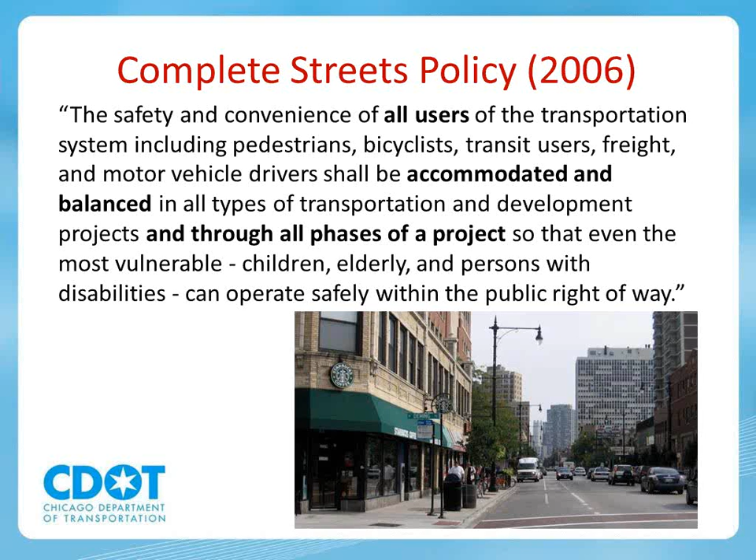So we've had a complete streets policy in the city since 2006 that you see on the board here, to accommodate and balance transportation for all users. But what does it mean? We didn't really have it spelled out in terms of roadway design until we came out with the design guidelines in 2012.

Why is it important? All the reasons listed here. Better health if we get people walking and bicycling. We find that neighborhood business districts are more vibrant when they're compatible with walking and biking, and these are more and more the areas where people want to buy homes and live. Safety, we are trying to reduce crashes, reduce speeding, and protect life. We also find people are driving less and using other modes more. We've got environmental challenges, heat island, and climate change that we want to address, as well as making sure the infrastructure we build today is going to last longer and serve more purposes than how we've thought about it in the past.

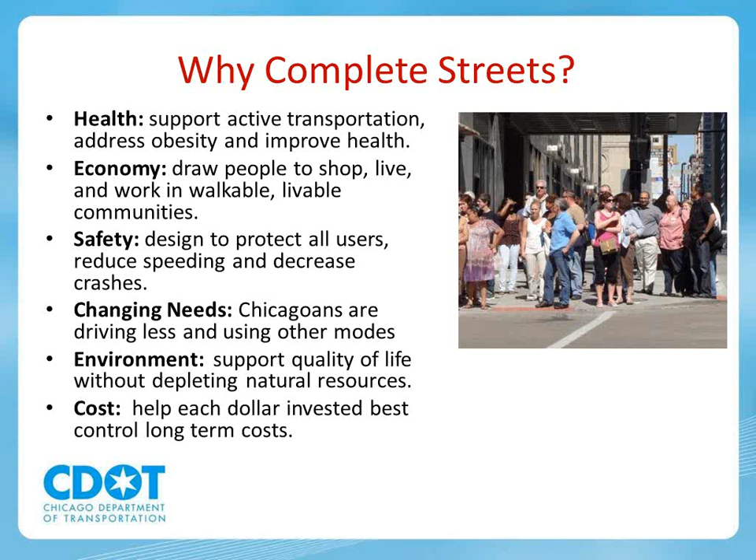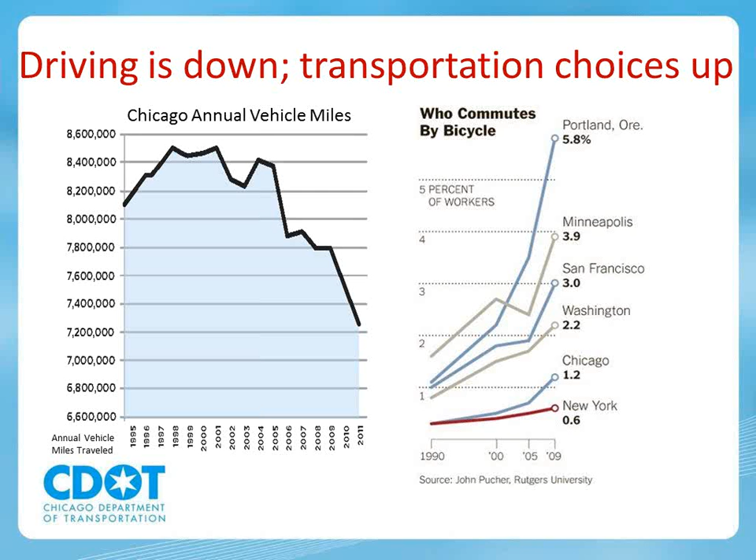So here's just a sample. We find that vehicle miles traveled is going down. It went down with the recession, but you'll see that the trend continues, and people continue to drive fewer miles. At the same time, as cities invest in other types of infrastructure, they see an increase in bicycling, shown on the right-hand side here. Cities that have made these investments are finding that bicycle commuting is going up, and we also want to see walking mode share go up as well.

So CDOT's goals, and remember there's a quiz at the end, hint hint, is to eliminate pedestrian crash fatalities in 10 years. We set that out in 2012, so this is by 2022. It's really all traffic fatalities, but I'm the pedestrian coordinator, so we're really trying to address pedestrians first as the most vulnerable road users. We want to reduce injury crashes 50% in 5 years, and also increase the amount of commute trips made by walking, biking, transit, and also working from home, which tends to compete with some of these modes. And we're right now at 38%.

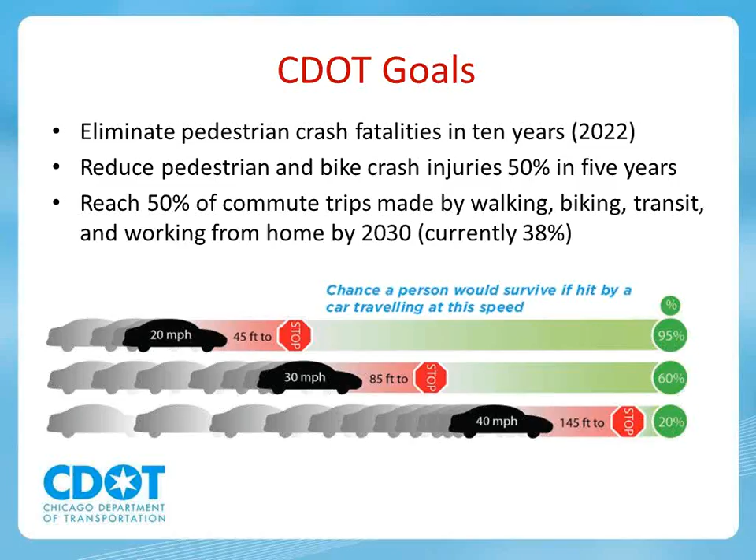Good afternoon, everybody. All of these goals, and a lot of what Suzanne is going to talk about today, are really part of this broader umbrella of efforts by the department. What we're calling it, or how it's manifesting itself, is this kind of three-pronged approach to making great streets for the city of Chicago: starting with our Complete Streets Guideline, which we're going to talk about today, as well as the Sustainable Urban Infrastructure Guidelines, which we'll touch on also, and then forthcoming, our Placemaking Guideline. The idea is that the intersection of all three of these design guides will really lend themselves to creating better, safer, and sustainable streets for the city of Chicago.

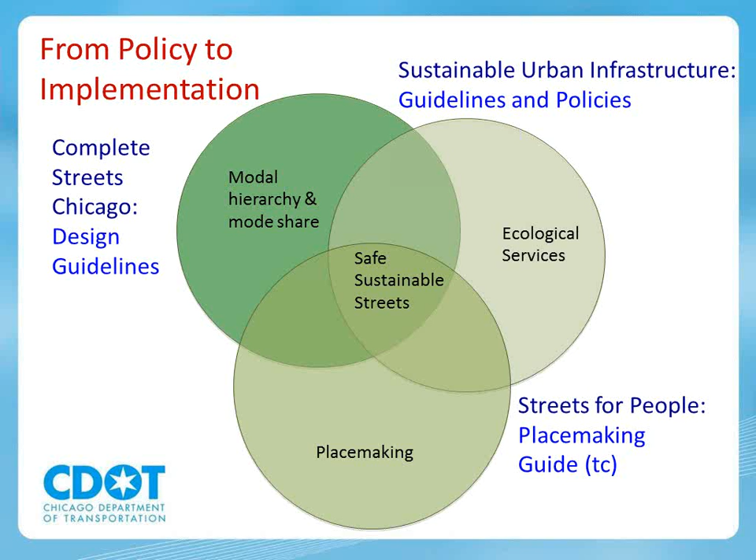And really how we're accomplishing that is through our implementation process. As you can see on the screen here, we're outlining our project delivery process across the board for all three efforts. What that means is that it'll actually be one coordinated project delivery process whereby we're taking into consideration safety and complete streets, as well as sustainability, and, as I mentioned, forthcoming placemaking, to really make a better public way for the city.

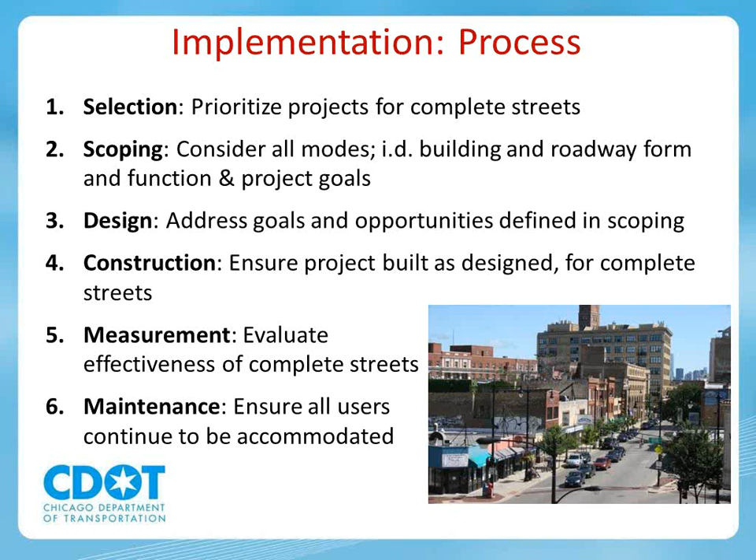And it'll boil down to some very project-specific guidance. In order to do that, we've created a tool that we're kind of beta testing right now at the department. We call it the Project Delivery Notebook. It's essentially a document that tracks our project delivery process and provides guidance for step-by-step decision-making. It also ensures oversight by the compliance committee. But the thing to take away from this is that while we do have a compliance committee, and while we are setting forth requirements for projects, the process itself does allow for variances, and also allows for projects to deal with existing conditions through those variances as well.

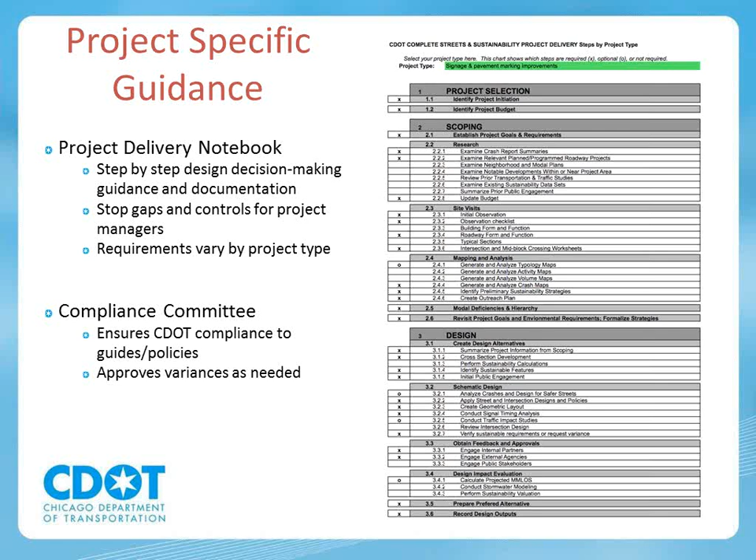So as the project moves through the department, we're able to see where it's at and how it's been progressing. For firms that have CDOT jobs, you might see in RFPs that you have to meet complete street goals, and this is the tool that your project manager will hand you and work with you to provide guidance during the project delivery process.

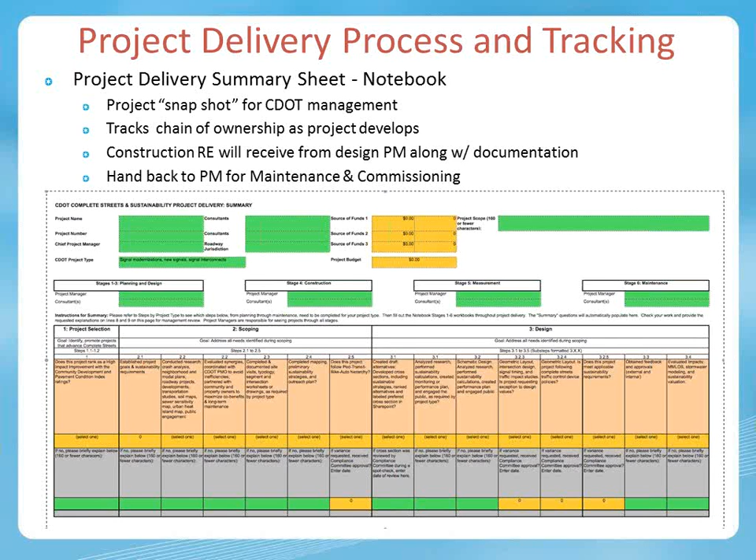Getting into the content of what it means to design complete streets, the Complete Streets Design Guide at the very end will give you our website so you can go and access the guide online. It's organized into modal hierarchy, typology, design values, and procedures.

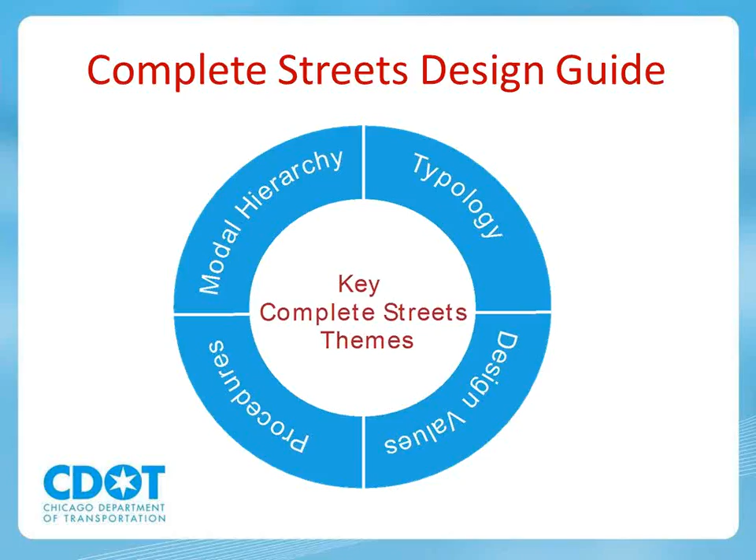So this is really the crux of it. We are now designing our streets with the pedestrian in mind first, then transit users or transit vehicles and users, bicyclists, and then automobiles. That's really a flip of what we've been doing for 50 to 100 years, where we've thought about the automobile, the speed, the turning radius first, and then let everybody else kind of borrow the street.

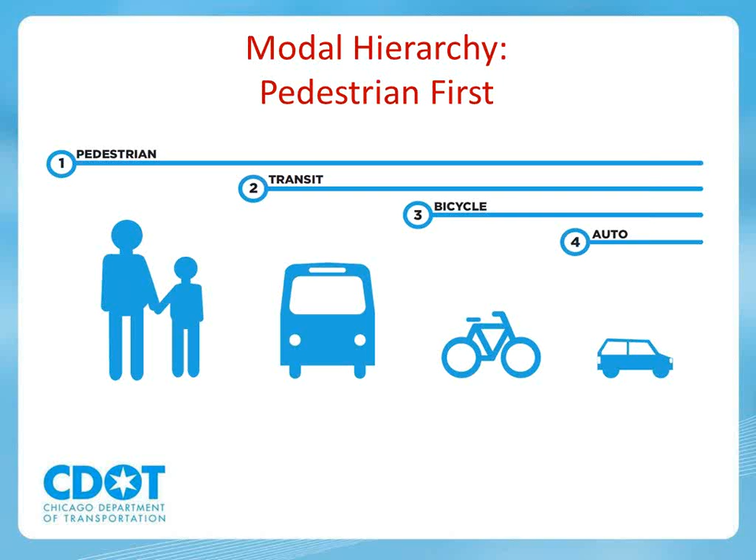We're really trying to make it so we accommodate our most vulnerable users first. This doesn't mean that we're designing pedestrian-only streets or bicycle-only streets. It means that when you're making choices between the modes, you're going to optimize for pedestrians first. So thinking of turning radius, you're not necessarily going to optimize for a semi first. You're going to think about how that pedestrian, how the family with a child is going to cross that street safely first.

So what does it look like? This is not my favorite complete street because I find that it's still pretty wide and we're kind of retrofitting a pretty big, pretty fast street. But you'll see that we've included a lot of complete streets elements.

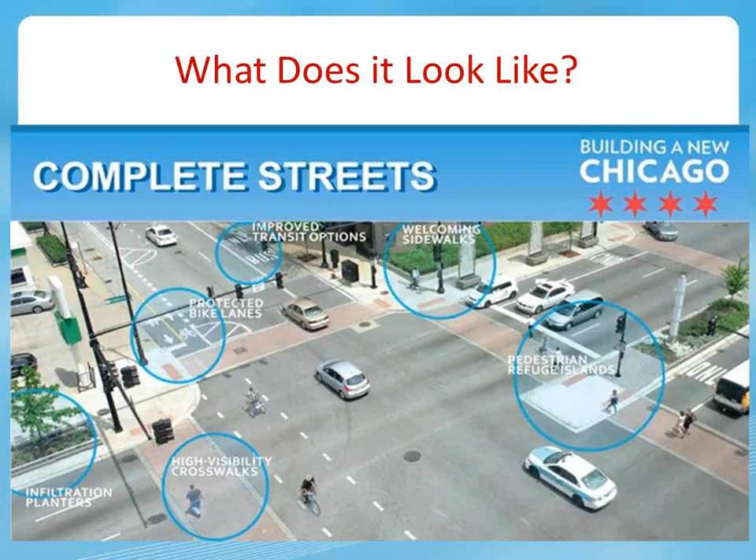You've got bike lanes there. You've got decorative crosswalks, we also use the continental stripes, which is more high visibility. You have pedestrian refuge islands for someone, and it happened to me the other day, who gets stuck halfway across and has to wait for the next light cycle. You can see there's transit in the picture, taxis, infiltration planters, so we're also addressing stormwater, and then it's more attractive than it used to be.

So there's a few important things about complete streets. It's not that you will always have all these elements as shown here in every single project you do, but you're going to think through your project and make a lot of choices during the design based on complete streets principles. So we're really building a lot of things up front in the process.

Many of you may be doing this already, looking at crash history before you even scope your project. So trying to find out where the conflict points are, what are issues of concern, and where you can make some improvements, and how the crashes happen. Are they turning crashes, straight ahead crashes, rear end, what's going on the street?

Putting those planners to work and starting to use some of the neighborhood plans and transportation plans that have already been developed. Environmental conditions, it's going to be important what kind of soil you have, how much water you can infiltrate. If you've got flooding issues that you can solve in your design, addressing urban heat islands, and can you add to public space? A lot of times there's spots in the roadway where the lane doesn't continue, or a car never reaches that corner, and you can turn that into more public space or pedestrian space.

It's also important to get out there and see who's using the road and how. Where are the bus stops? Is there a hospital there that people are going to? Do they always cross in the middle of the street? There's ways to address that in your design.

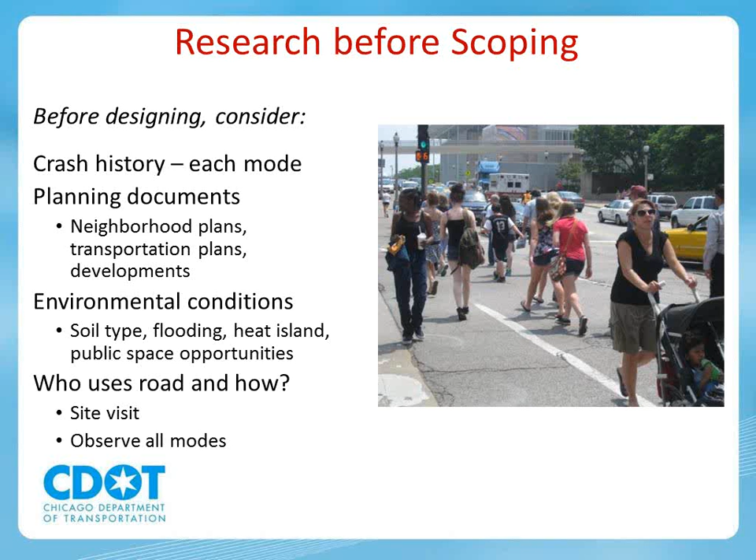This is an example of a crash map we did for a project at the Kimball Lawrence transit station. Our project footprint is an eighth of a mile around the transit station, so we mapped pedestrian and bicycle crashes. This is specifically a walk-to-transit project, so we didn't really look at the automobile crash patterns in this map. We were mostly concerned with what pedestrians were doing, and then we tried to address the hot spots during the design.

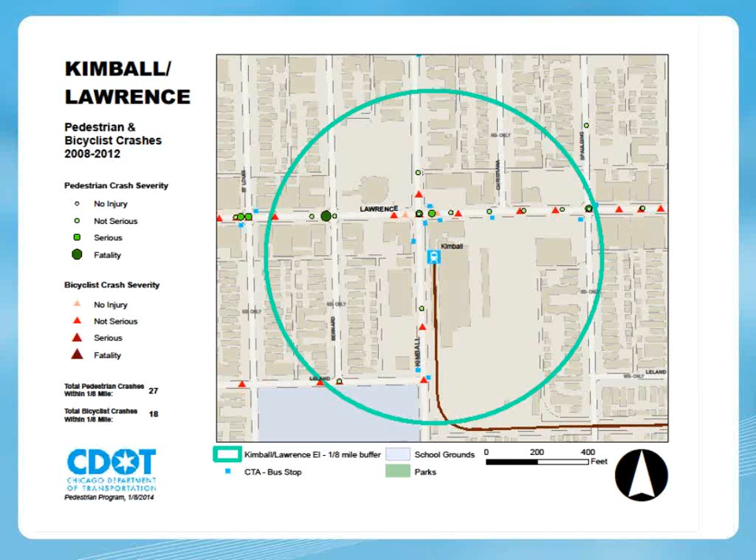Another thing that's different about Complete Streets compared to previous processes is what you're looking at in the built environment. We're starting to look at building form and function and roadway form and function, not just what type of street you have, how many lanes, and how fast everyone goes, and what the level of service is. We want to start looking at the land use, what type of businesses are there, what's the regulatory zoning, and also the roadway form and function, what's the character of the roadway, who's using it and how, what's parking like, what do traffic operations look like, looking at intersections and conflict points.

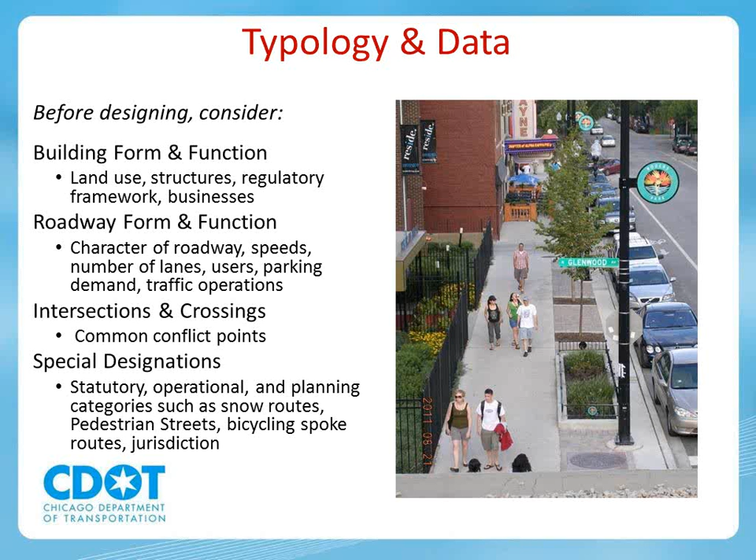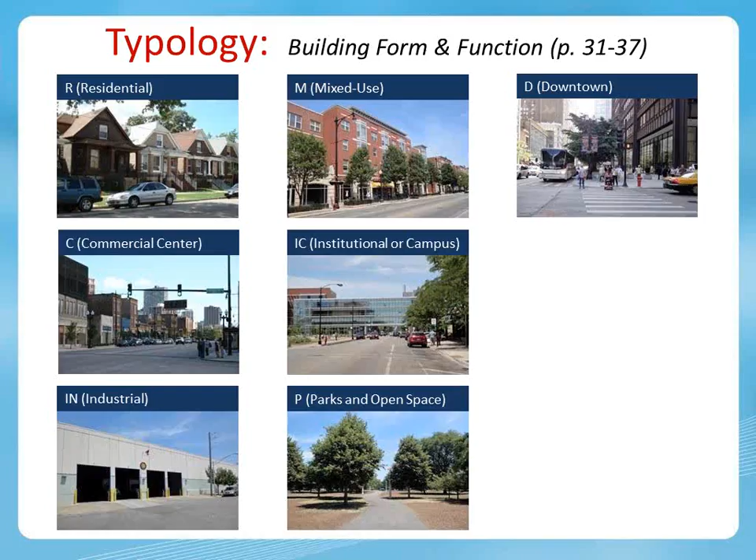Just quickly, our building form and function typologies are residential, mixed use, downtown, commercial centers, institutional or campus, industrial, and parks and open space. We don't have a master map of this - it's really at the discretion of project managers and the design team. I find that when you get into Google Maps and Street View, you can assess this pretty readily. It's not an exact science, but you should be able to tell what the predominant use of your project is, and it may change - two blocks with one type of thing and three blocks with another.

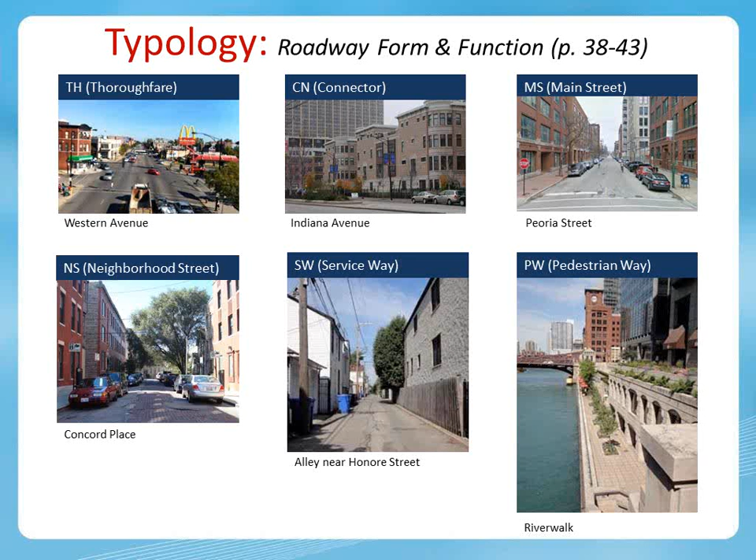Intersections and crossings, same idea. I won't talk all the way through this, but you can find these on page 44 to 50.

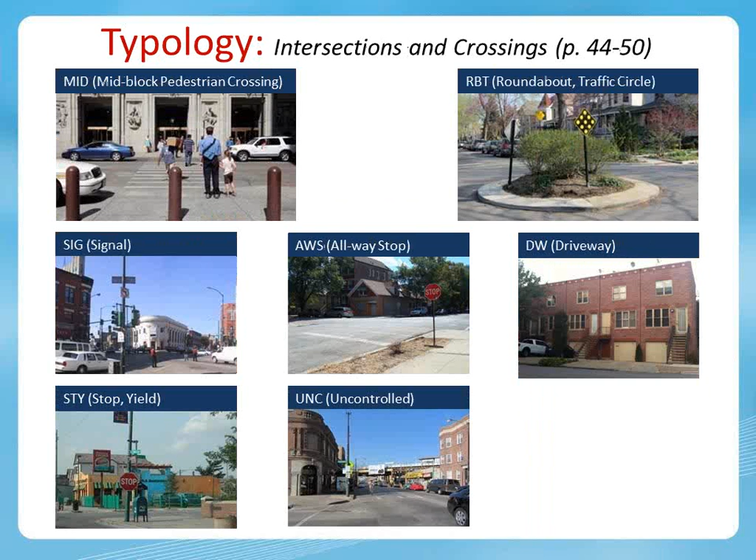Just like the Complete Streets Guideline has its structure, the Sustainable Urban Infrastructure Guideline has a structure as well. It starts out with our mission and purpose statement, and then quickly goes into what we're calling 8 environmental categories. For each of those categories, through our task force - which consisted of staff from various sister agencies, as well as various consultants and people from the industry - we set objectives for those categories, and they were ranked based on what that task force felt were priorities for the city of Chicago.

In order to meet those objectives, we set some requirements. These are very specific actions or activities that can be done in a project, both during design and during construction, in order to meet some of the objectives for sustainability. We also provide a series of strategies, and these will be clearly outlined in Volume 2, which is forthcoming this summer. The strategies in Volume 2 are essentially a toolkit for how to meet all of the objectives and requirements that each project necessitates.

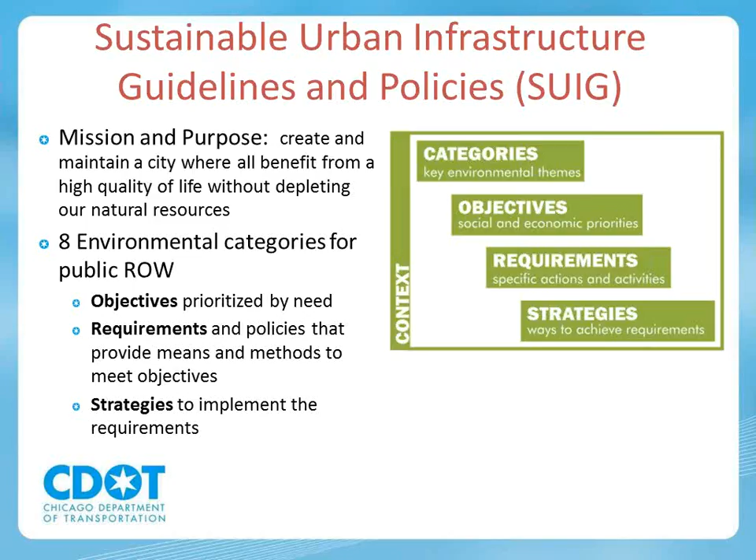So again, here's some of the categories and objectives. There are 8 categories - these are the first 4: economics, water, materials, and waste. Underneath those, you'll see the objectives, and again these are prioritized based on what the department and the task force felt were priorities for the city of Chicago. For example, number 1 under water is reduce basement and street flooding. Similarly, in materials and waste, number 1 is maximize construction waste reduction and recycling of construction waste.

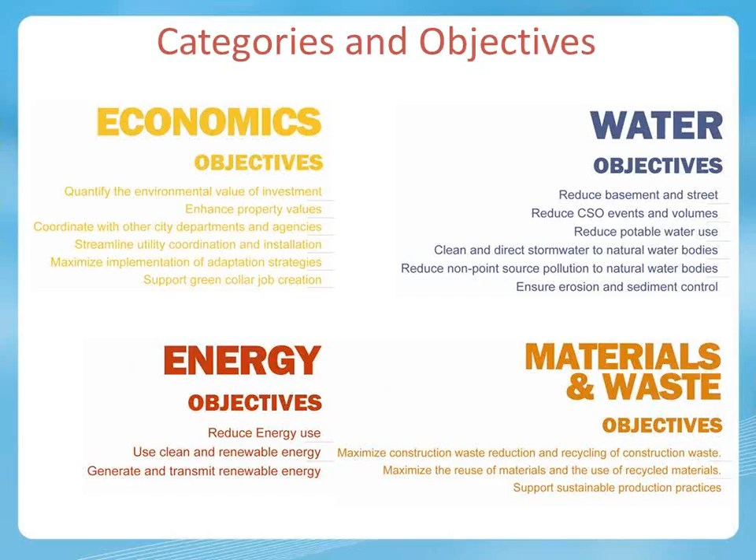If we go to the next slide, you'll see the next 4 categories: urban ecology, climate and air quality, beauty and community, and commissioning. For example, in climate and air quality, the number 1 objective is reduce urban heat island effect, and there are a number of requirements to help us achieve that goal. There are also a number of strategies, and sometimes these are synergistic - if you implement one strategy, you may very well be meeting an objective in multiple categories.

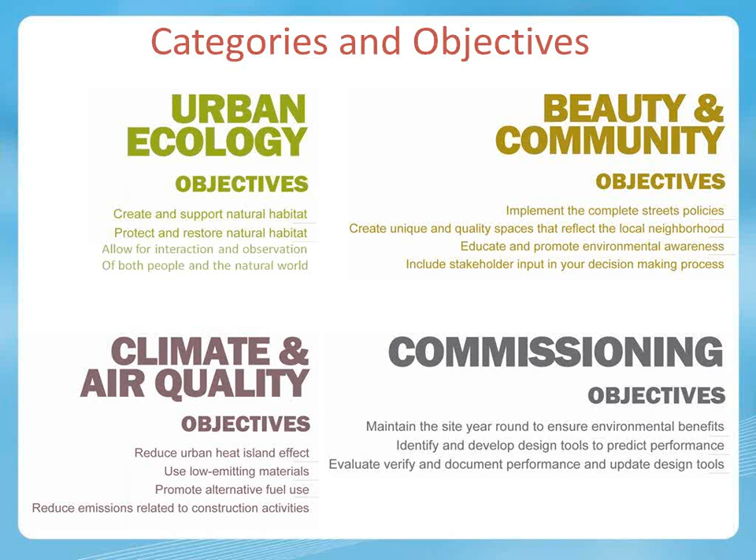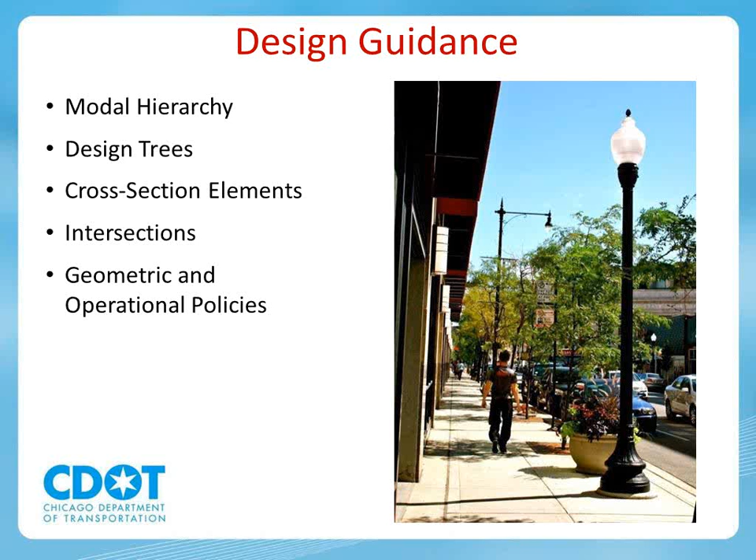So jumping back to Complete Streets design principles, we're going to talk about modal hierarchy, design trees, cross-sections, intersections, and some of the geometric and operational policies. These are all laid out in the design guide, and I'll just cover some of what you'll find in the next couple slides.

So the cross-section elements, in the old days, we probably thought more about the vehicle realm, that area where you've got your bus lanes, travel lanes, and bicycle lanes. That may have been the real focus of a roadway project, but there's so much that happens in what we're now calling the interstitial area and the pedestrian realm that really make complete streets.

So we've laid out different options and different things to think about as you're constructing and designing projects. If you've been doing streetscape projects for CDOT for a while, you've probably thought about that and looked at a lot of these elements already. So we're really just building it out and then looking more at the median also. There's a lot you can do with the median that may be ignored at this time.

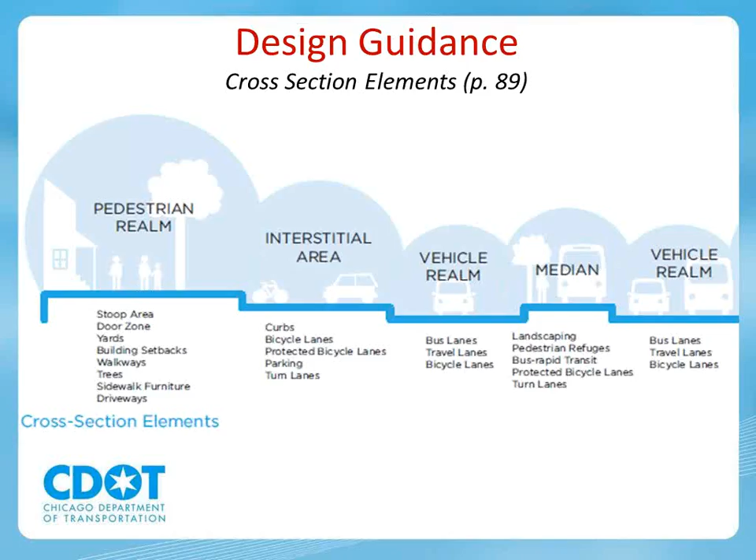I should mention, Gerardo talked about the compliance committee. This doesn't mean that every project will always be this way. You can go to the compliance committee to get a variance. If you have a bus rapid transit project, if you have a bicycle spoke route on your route, those are probably the main ones. You may want to optimize for transit and bicycle respectively for those types of projects, and you would run that by the compliance committee. If you don't have a compelling reason, then you're going to go with that default hierarchy.

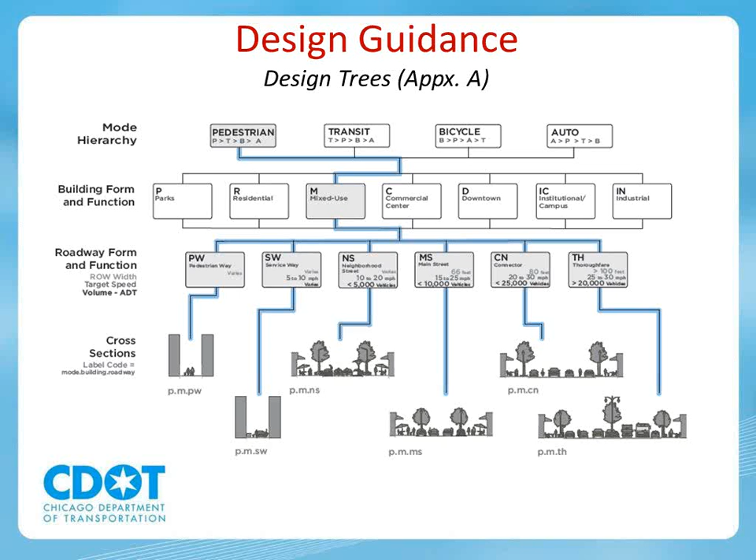Again, we talked about building form and function. So for this example, let's say we've got mixed-use type of buildings in our project, and then our roadway is more of a connector, so something like, let's say, Clark Street. Clark Street project would fit well within this. That brings you to a cross-section for P for pedestrian, M for mixed use, and CN for your connector.

And then we've got a bunch of sample cross-sections laid out, which will give you some ideas about what you might put where and what you might add to your project.

We don't really have sustainable elements here, but I think you can start to think, okay, you've got your furniture curb zone where you might do some infiltration, and you've got some bike lanes where maybe you can do permeable pavers. I guess I'm kind of thinking big and expensive here for just a minute, but it doesn't hurt to dream. And the sustainable infrastructure guidelines also have similar illustrative cross-sections that kind of show how you would embed sustainability into the right-of-way.

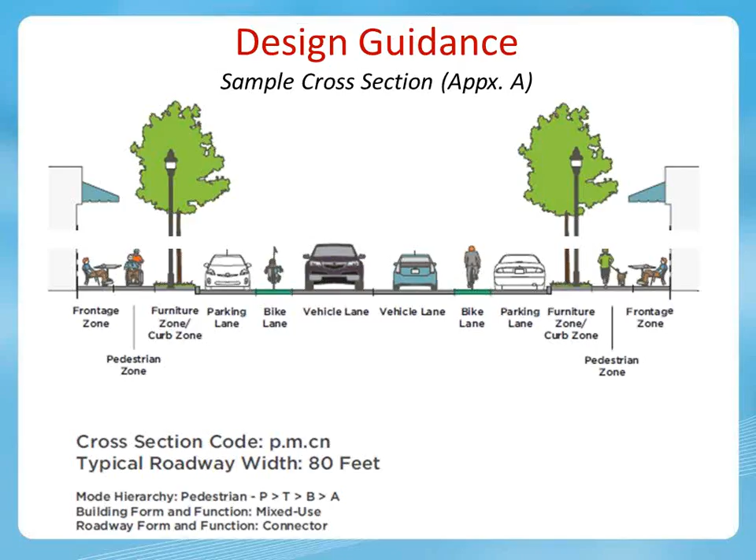So getting down into the nuts and bolts, and I'm not an engineer, so I get out of my element quickly with this, but we've got a lot of specific policy guidance around all these issues.

We're really trying to move away from level of service as a measure of whether our roads work or not. Because again, if you're trying to accommodate your pedestrians and maybe doing something like a leading pedestrian interval where the pedestrian's going to jump on traffic, you're going to have to change your signal timing. There's only so many seconds in the world, and you may not have your vehicles going through with as much timing as they have before, and you have to balance these.

Right turn on red, again, if no one turns, it's better for the pedestrians if they don't have these cars coming at them. So there's a lot of appropriate places where we might add or eliminate the right turn on red.

Again, you want to rely on your roadway observations and find out who's using the street. If you're on a street like Central Avenue or Cicero, you have a lot of trucks, and you may have to design a little differently in those situations.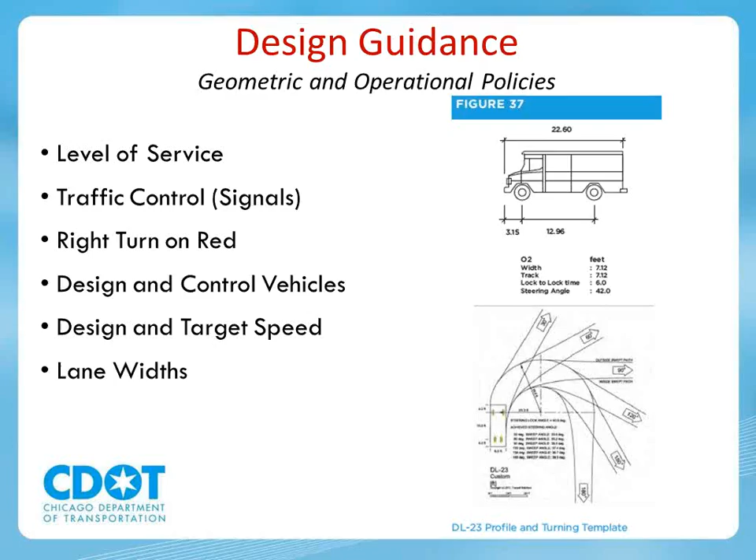Lane widths are also important to that, bringing down speeds by bringing down the lane width. And that's also where you get your trade-offs. If you can narrow down your lane width, you can accommodate that interstitial area, the bike lanes, the pedestrian right-of-way a lot better, and you can also shorten your crossing distances.

So some of the principles we're looking at, is making intersections simpler, trying to eliminate some of the approaches if possible. Making them smaller, so bumping out corners where you can, and that's tricky when you have bus stops. Where you have no bus stops, you may be able to bump out quite a few corners. This shortens your crossing lengths and gives pedestrians better visibility when they can get out into the roadway a little bit while protected on that bump out.

Aligning lanes, squaring off intersections, managing speeds, thinking about how buses and cyclists are going to deal with each other at the corners. That's kind of a tricky emerging field. I think we're coming up with more and more strategies about how to do that.

Talked a little bit about prioritizing signals for pedestrians, looking at your timing, giving that leading pedestrian interval if you have a chance to, and making sure you have enough crossing time. If you're near a senior center or hospital, we do want to slow down the crossing time a bit to make sure that a common road user in that area will be able to get across.

There's kind of this new field, I don't know if it's really a field, but when we had so much snow on the ground this winter, you could see areas where a car never went. You could see like a one-way street intersecting a one-way street, and then there's a patch of snow that sits there for two months that never has a car track over it. So we're starting to think about some of those areas that could be used differently, that aren't being used for vehicles, even though they're part of an intersection or a roadway.

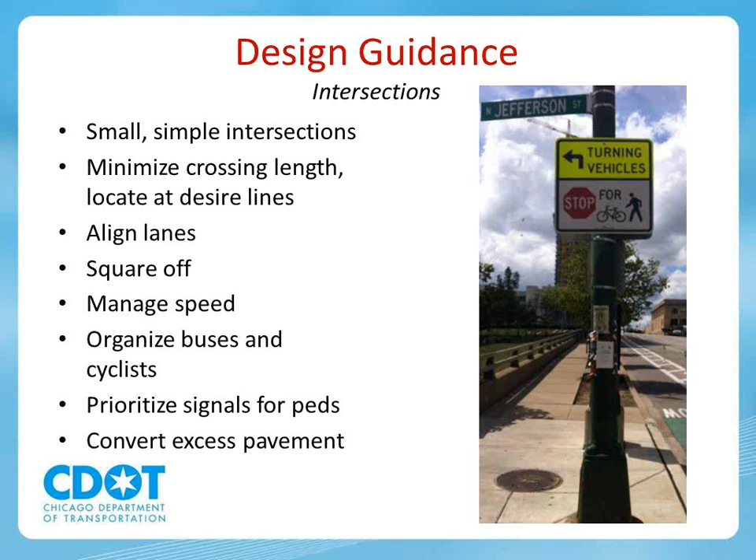So we're going to shift topics a little bit. This is really how you're designing your project. Remember, we're tracking all this in that Complete Streets notebook. And part of that is for you to understand what kind of data you brought to the table, what kind of crash data, and how you're designing your road, and then getting ready for a handoff to the construction team. That's particularly important around sustainable principles, because we need to show the construction team how you designed the road and why you made some of the choices that you made.

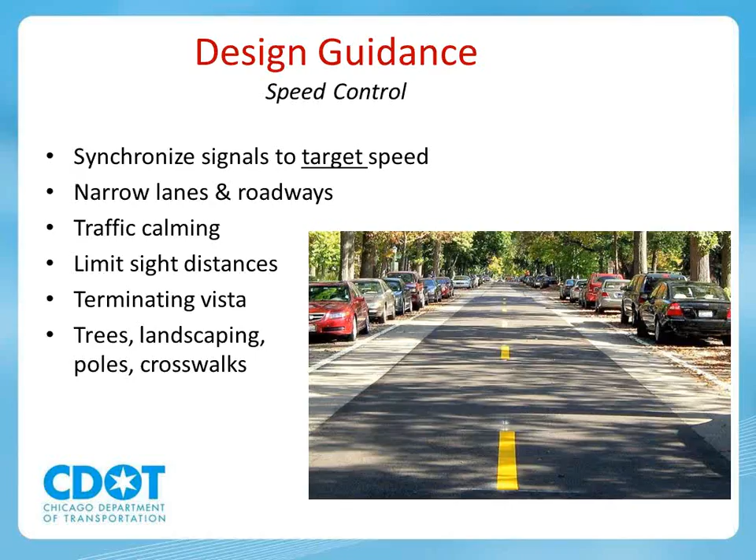So we'll get into how we might document that. In this integrated project delivery process, the documentation of data and the creation of tools for data collection during and post-construction are just as important as the actual design process, and collectively are integrated into the project delivery process.

As part of the Sustainable Urban Infrastructure Guideline, there are some documentation reports required as part of this design process. Some of these include stormwater pollution prevention plans. You may be familiar with some of these in different contexts, but these are more suited to what the department is trying to achieve from a sustainability point of view within a dense urban condition.

A big one is a construction waste management plan, figuring out how much waste is going to be diverted from a landfill, as well as figuring out how much recycled content your project is going to be using.

And a traffic management plan—these are things that as design consultants you're already working on and preparing for the department. But taking a more holistic approach, through that modal hierarchy Suzanne mentioned, providing bike and pedestrian access through construction zones is something those documents are outlining as part of the construction process. These are tools created during the design process for the construction process, so there's a bit more integration and chain of ownership from one process to the other, aside from just putting a plan set together.

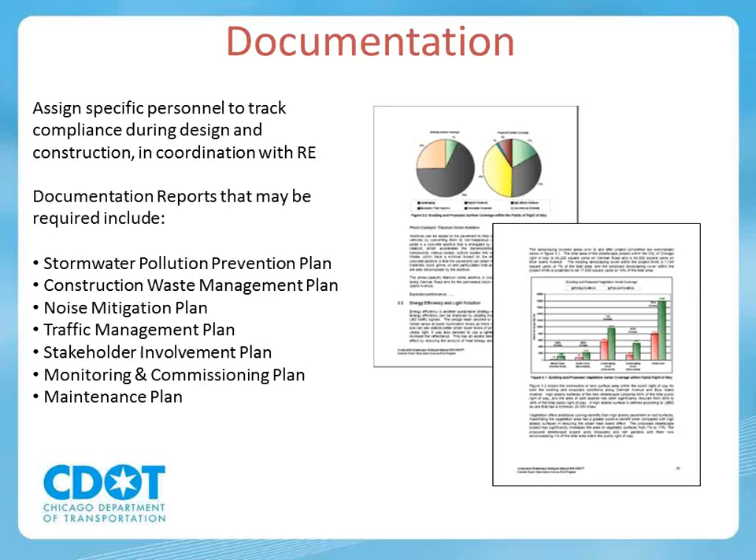A lot of the data collection during the project delivery process can be divided into two categories. One is quantifying assets—a list of outputs like how many pedestrian refuge islands did your project install, how many miles of protected bike lanes, really just a count of what your project holds. That's twofold: it's good for tracking, so the department understands how much of this new technology we're installing, but it also helps down the line with maintenance programs and understanding what a project has within our databases.

The other data collection effort is about measuring success—performance metrics that require monitoring. Different project types require different levels of requirements, so a lot of the monitoring comes into play with larger projects, figuring out how much stormwater your project is diverting from the storm sewer, whether your BMPs are working as designed, and on the complete streets and safety side, tracking reduction of crashes over time. So we're not just building a project anymore and letting it be—we're commissioning it and fine-tuning over its life.

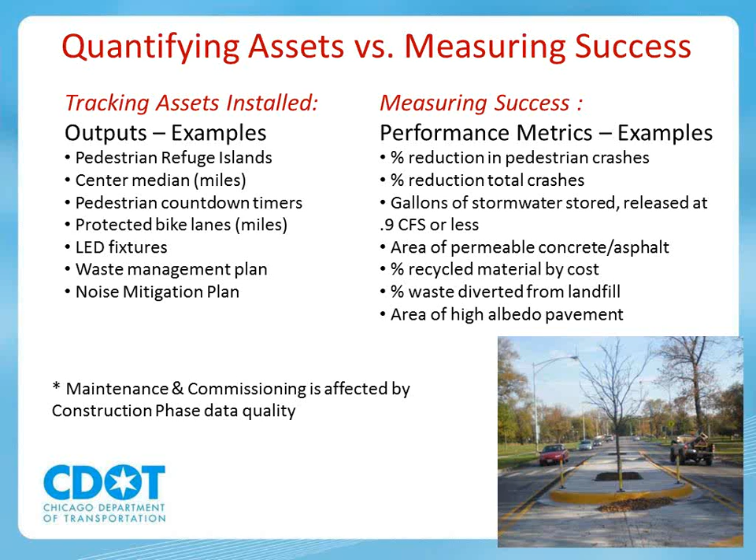Which leads to this slide. Even as part of this integrated approach, commissioning and construction become more prevalent during design, having to think about and plan for those. That's really the takeaway today: as we go through the project delivery process, as designers, consultants, or in-house CDOT project managers, we have to start planning for commissioning and construction in a different way early on in the process.

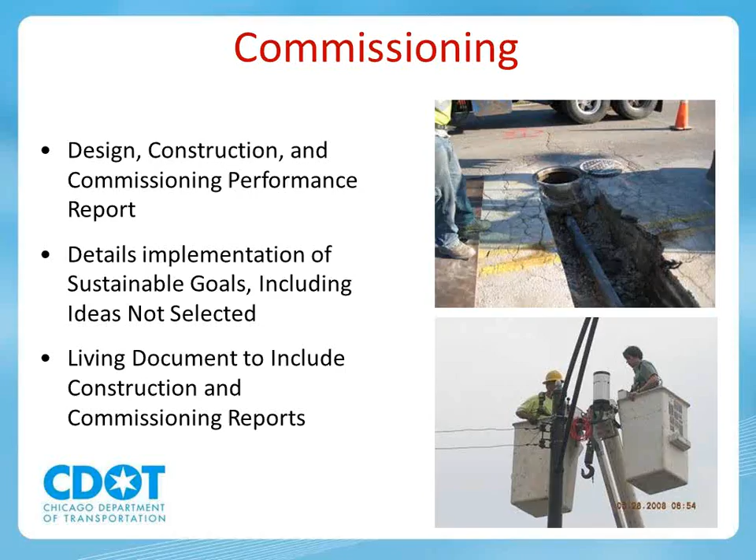There will be impacts to typical construction practices that designers need to be cognizant of during the design process. Construction sequencing, particularly for stormwater BMPs and protecting existing or future ones, is going to be critical to ensure that when those are built, they function and maximize their function.

Also, taking into consideration and doing a bit more research on regional materials, figuring out where your contractor can get all the components for their light pole in order to meet their goals as they're building the project. Again, we talked about construction waste management and all the documentation that becomes part of this process, preparing that for the construction process.

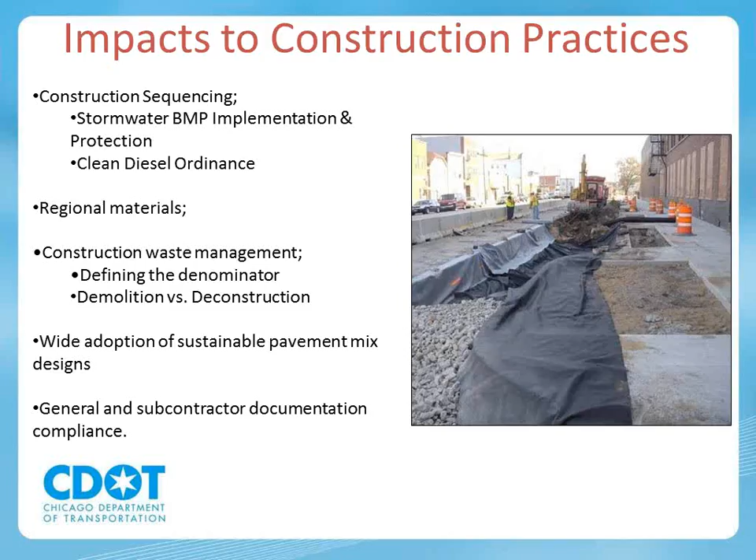Now we'll get into a little lighter material, just looking at some pictures and seeing how this hits the road.

This is one of our earlier complete streets projects. It was an opportunity during our arterial resurfacing, where we knew South Chicago was a pedestrian crash corridor, but didn't have any projects set aside to make it better. We got ahead of the game and did a new striping plan to narrow the roadway, do a road diet, and install a bike lane.

This didn't come out of Streets for Cycling, and wasn't necessarily because there was demand for bicycling on South Chicago, but it was a way to eat up the roadway. So we put in a generous center median, created one travel lane with more consistency so vehicles know where to be, and then striped out the bike lane on the outside.

So you've got a lot more distance between your vehicle and your pedestrian. As you can see on the right-hand side, that woman getting out of her car is probably 8 feet away, we hope, from where an automobile should be.

We want to go back through here and concrete it up, so put in pedestrian refuge islands in the middle. Maybe someday we'll have flexible delineators around the bike lane, something like that.

We got some pushback from the community once this went in. Everyone thought it was really for bicycling, asking why we were putting bicycle lanes here since we don't have a strong bicycle community in this area. We really had to talk up that it was meant to be pedestrian improvements and reduce pedestrian crashes in the corridor.

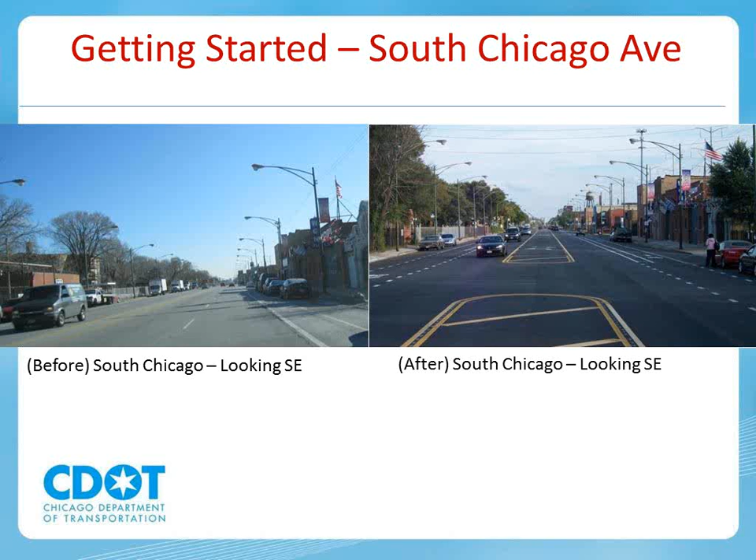Here's another good example we're probably all familiar with. Dearborn Street had about 8,000 vehicles coming through in a day, and yet it had three plus, even 4 lanes for automobile traffic. It was really more than was necessary for what we saw on that street.

We had a great opportunity to put in not 1 but 2 bike lanes, counterflow, so people are going both ways in the bike lane, and then protecting that with parked cars. I think over time people have gotten it, they figured out to park in that middle area and not in the bike lane most of the time.

If you look at the beginning photo, you see there's a bicyclist kind of struggling to figure out where he's supposed to be. You've got a delivery truck making use of what's supposed to be a bike lane, and just cars spread out around the street.

You can see now that the bicyclists are going to be protected from automobile traffic, and you've got a little bit more comfortable sidewalk because of those extra lanes.

I should also mention that this is cheap, right? We just went in and restriped it and then put in some bollards. So we were looking for some low-hanging fruit and ways to increase bicycle infrastructure and get complete streets. It doesn't always have to be expensive.

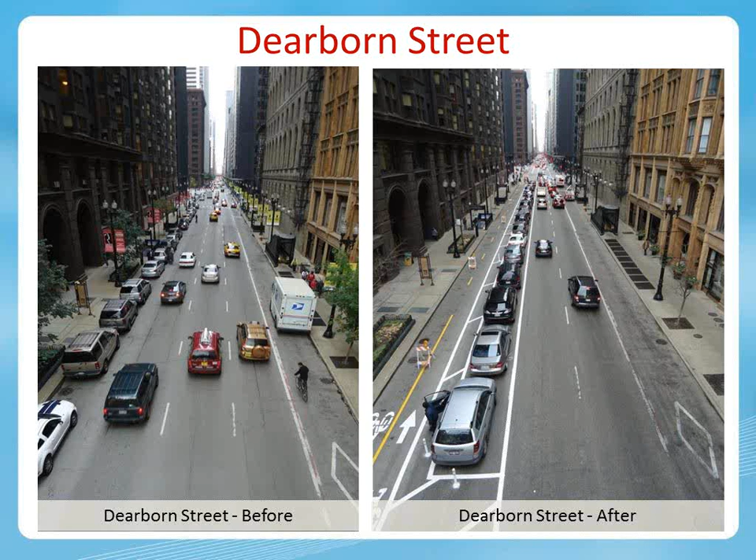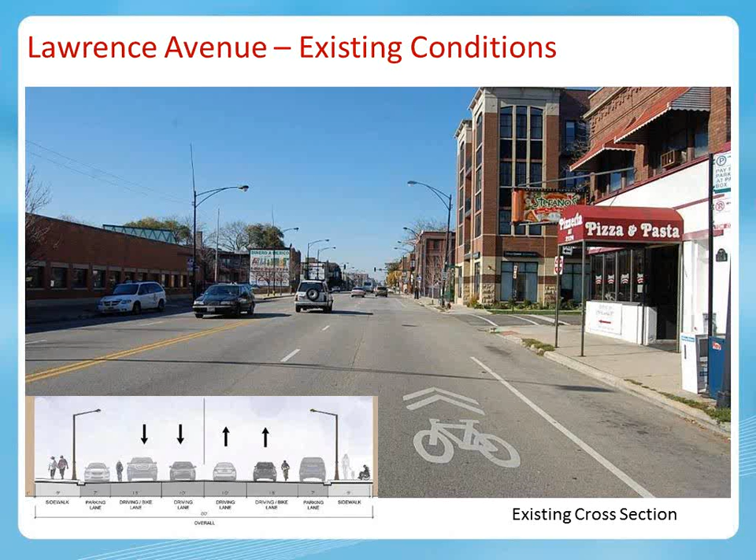Lawrence is another example of a very wide roadway with very long crossing distance for pedestrians. Of course, we do have a shared bike lane, but really a lot of capacity for arguably not a lot of use. This project is under construction.

What we're hoping it'll look like soon is reducing one of those lanes to a single lane, adding a pedestrian refuge island to shorten that crossing distance and provide some refuge in between, adding a dedicated bike lane, and as you see on the right, the bump out does two things: it's providing green infrastructure as an infiltration planter, while also contributing to that shortened pedestrian crossing.

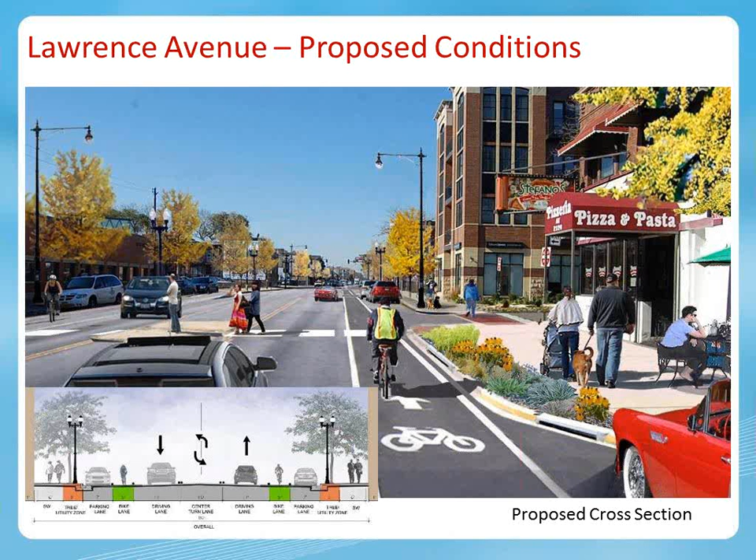This is another project that blends complete streets and sustainability very well. It's actually the Pilsen Blue Island Sustainable Streetscape.

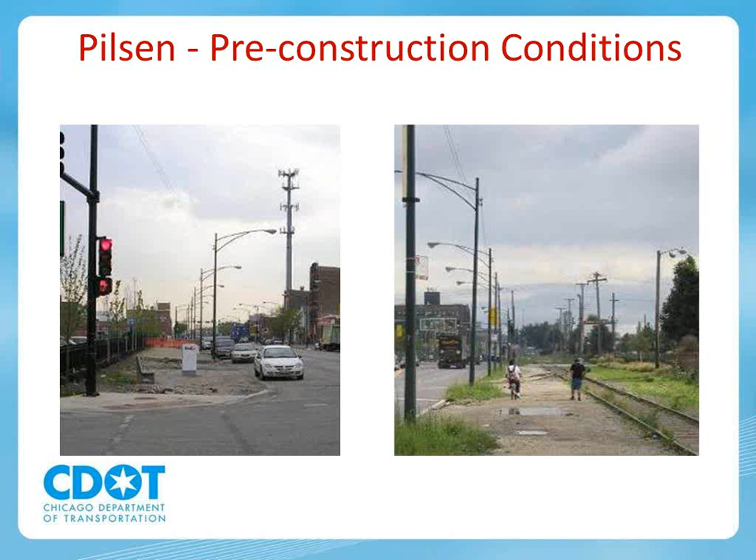These are some existing condition photos. It's a very wide mix of industrial, residential, and commercial uses. There's a school in this corridor, a high school, and you can see kids were walking along railroad tracks to get to school. Cars were parked on the sidewalk, and in general, even though the sidewalks were very wide, there really weren't any bike or bike-friendly facilities before.

This is a diagram of the proposed cross-section. For this project, it actually made sense to shorten the sidewalk, which was plenty wide as it was. A shorter sidewalk keeps industrial vehicles and cars from parking on it.

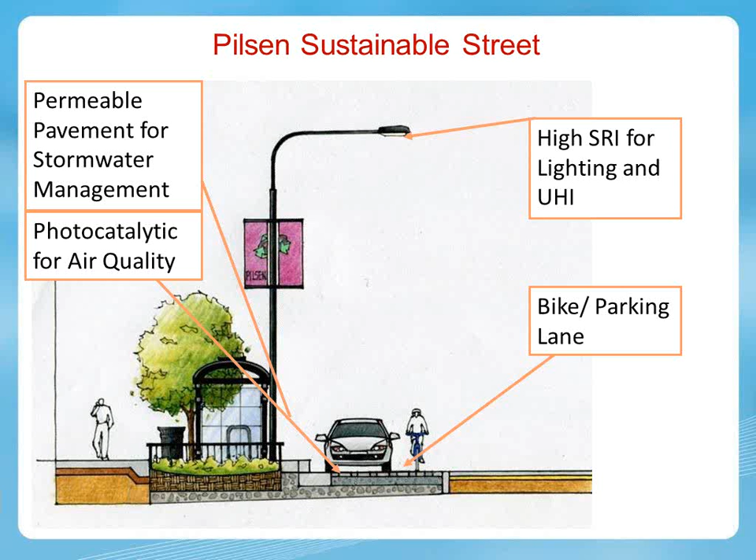We added infiltration planters, new trees, high white light, and a bike lane. By shortening the sidewalk, we were able to add a bike lane alongside the parking lane, and both sit on top of permeable pavers, so we're getting a lot of infiltration. There's also a photocatalytic pavement overlay on some pavement areas to help with urban heat island and smog.

These are some after pictures. You see infiltration planters, nice sidewalks, and education. We installed solar and wind-powered LED pedestrian lights, which also have educational panels telling people what this infrastructure is doing and how it works.

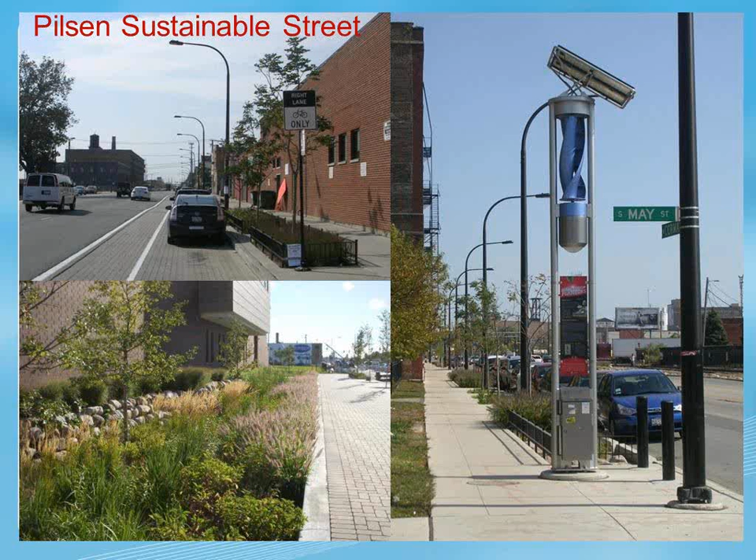We worked with the adjacent high school to build this bioswale and coordinate our efforts, and they also have a very large permeable paver field. That coordination is another important aspect of sustainability for the department, being synergistic in how things are built and maximizing the city's investment in the neighborhoods.